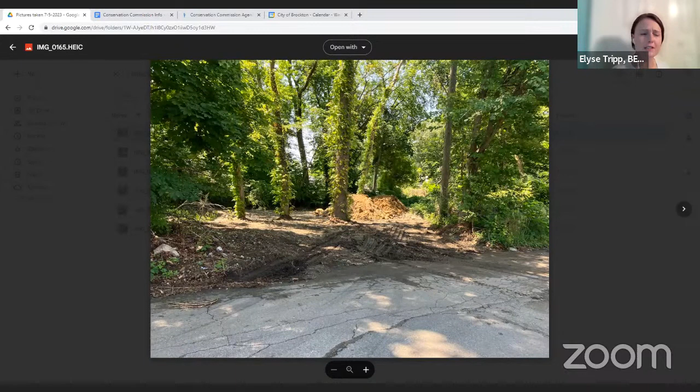I'm not sure, as far as the pipe, are you referring to like a culvert or something of that sort, Mr. Lopez? Yeah, corrugated pipe. Okay, yeah. From one side to the next, just to see if it could not have like a barrier if I fill it up or anything like that. Because I did all of that just because I didn't receive a notification that there was protection for the land. So I went ahead and did the clearing and everything like that, thinking that there's no conservation.

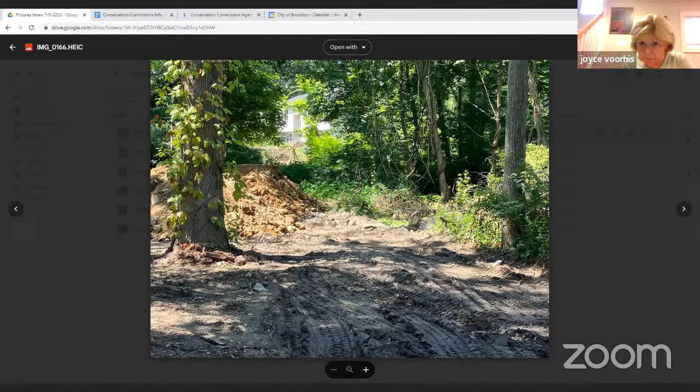And that's it for photos, Kyle? I've got some more photos. So you can't quite see it from the photo. I didn't get on the property, so all these are taken from the street. But back in this corner, there is standing water over here, and it kind of extends back over this way behind the pile of fill here. And that's kind of the area that the intermittent stream is in, and it goes along all the properties next to this down the road, if that makes any sense.

So there's certainly concern here, and there's another thing to add here. Once we got the complaints from neighbors, Director May of the planning department pulled up some old development plans for some properties on nearby streets, and on those plans there are some wetlands delineated, and that's another reason that we were able to confirm that there was a resource area here. But again, that didn't come up until after we got complaints from around the community. Mm-hmm.

Okay. Am I able to see the plans? I would like to know where the resource area is. Yeah, if possible. The plans weren't specifically of this area. I think it's Burrell Street, just down the way, where the Bellevue development was. So it's maybe a few houses down, but I can certainly forward that to you. That would be great.

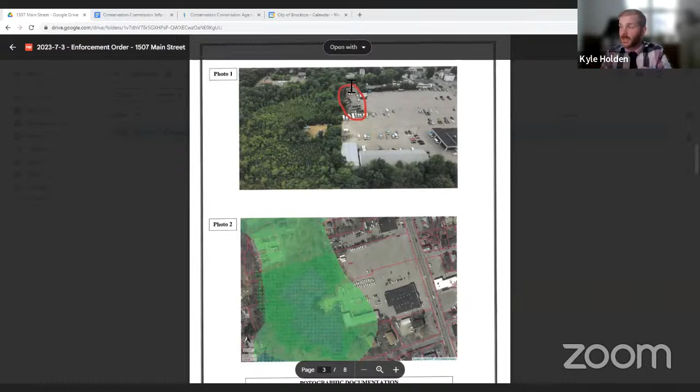This bottom photo here is showing the resource areas that are mapped on MassMapper. This parking lot here is the one that was extended, and it was extended into this resource area here, and you can see that circled in red on this top photo. So that area in the top photo is the area where the pavement was extended. And I don't think it's actually pavement. I think it's like a hard packed fill or something. But in any case, the parking area has been extended here into the wetland resource area. So that's why the enforcement order was issued. Thank you.

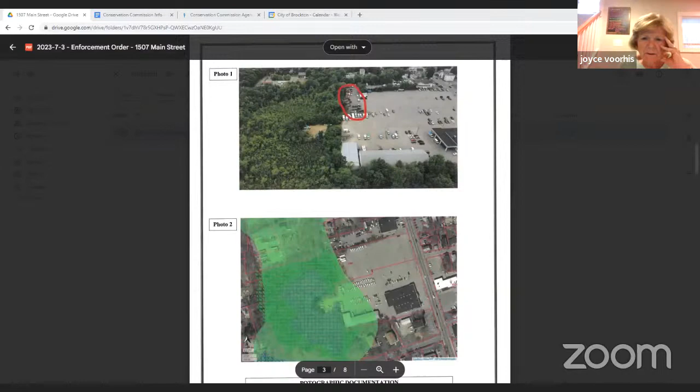Yeah. And have you promoted someone? Oh, Mr. Simo. Yep. Jay Simo has been promoted and is able to speak. Oh, and I guess we have another one called George. I think this may be George Brewster. I think he owns the ambulance service company, which is in the lot basically that owns this. All right, gentlemen, you're both here. You're able to speak. Thank you.

First of all, this is George Brewster, and I own the property. I'm trustee of the property. I rent the property to Brewster Ambulance, which are my sons. Our neighbor next door had asked if he could park a tow truck on our lot. And my sons told him, yes, you could. Well, that somehow evolved into multiple tow trucks, a multiple fenced in area, and it was all not with permission. Now, I'm willing to clean it up. Tell me what I need to do. And I will go after the person next door for damages. Thank you, Mr. Brewster. That's very succinct.

We try to be a good neighbor. We try to help out our neighbor, and this is where I am tonight. We also have the Brockton police buses on that lot. They need to be told to move. So you tell me what I need to do to clean it up, and I will do that. Okay.

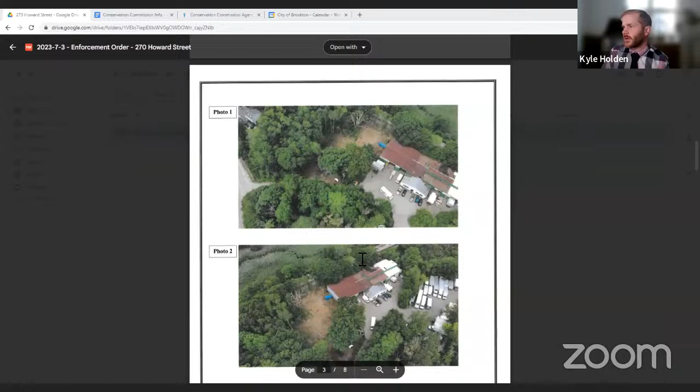So here are a couple photos that kind of show the area that's been disturbed. So this all used to be wooded here. And then I'll show you another. I think I've got it. Yeah.

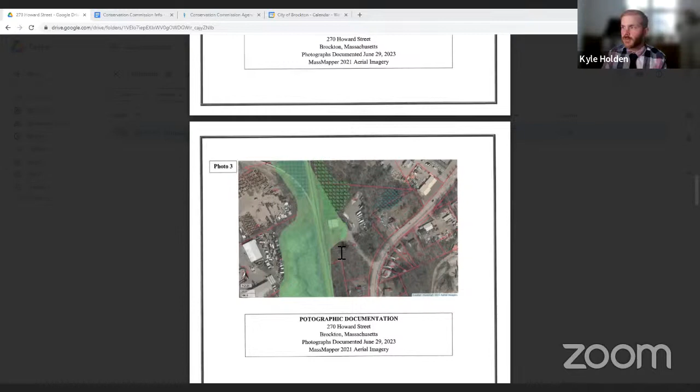And the concern is that any work that was done over here would be within buffer zone to the wetland. And then there's a little bit of flood zone that was also impacted. So that's kind of a brief overview visually of what's happened here.

All right. And I guess, do you want to hear from Mr. Burrell? Sorry, thank you. Hi, Mr. Burrell. Yes, hi.

Okay, so I met with Kyle last week just to discuss some of what has happened there. And again, my sons were trying to solve a problem we had with our insurance company, with trees, with graffiti, and clearly they overstepped. So I'm just looking to see what do I need to do to rectify what happened, and we'll get on it.

So once again, wetland delineation is necessary at that point as part of the enforcement order? Yeah, and that language was included in this order as well. Basically, the enforcement order includes the following: cease and desist all earth moving activity and construction within the flood zone and the 100-foot buffer zone from that wetland. Establish erosion controls at the existing limit of work to protect the resources that weren't disturbed, and then generate a restoration plan that will be submitted to the commission.

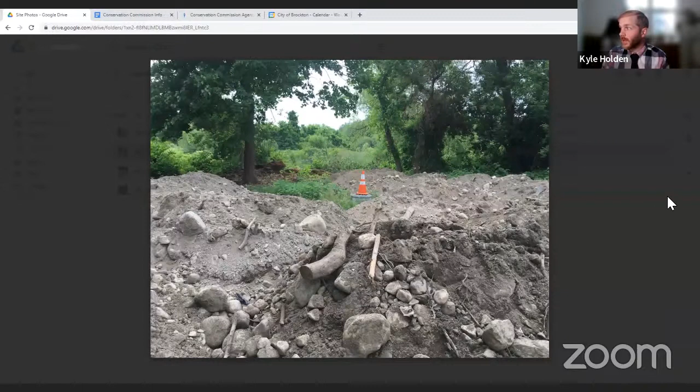I've got a few more here from Megan. Let's see. Okay, so she's actually farther on the site now. I think Trout Brook is kind of back in this area, but I'm not quite sure orientation-wise, but there's obviously quite a bit of fill that's been dumped back here. And again, these are all old photos. Wow. But it's pretty significant, right? I will show you the photos that I took when I was there last week or the week before.

And again, I've not heard anything back from anyone here, and I can check to see if anyone has their hand raised in the attendees to speak to this, but I didn't see anyone here to talk about this at all. And you're sure of the identity of the property owner? Yeah, I'm fairly certain. The individual it's registered to has their name on the mailbox outside the house, so I think it's the right person. They may have just declined accepting the certified mail. And I rang the bell when I was there the first time to try to get access to the site, and no one came down.

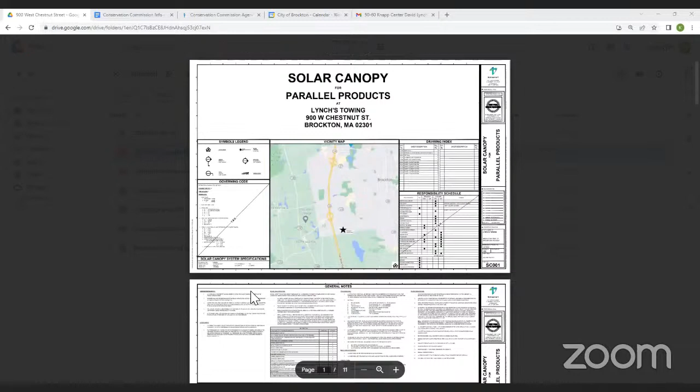Thanks. Okay, Mr. Farland, I've seen the very large tow trucks for Lynch's with lots of trucks and things on them. How high are these arrays? The arrays, just so you know, we're doing this throughout the Commonwealth. Specifically with Parallel Products, we have about 30 sites or so, and we're focusing on a lot of junkyards. Most of the time we're cleaning them up. This happens to be one that's going to be a new junkyard.

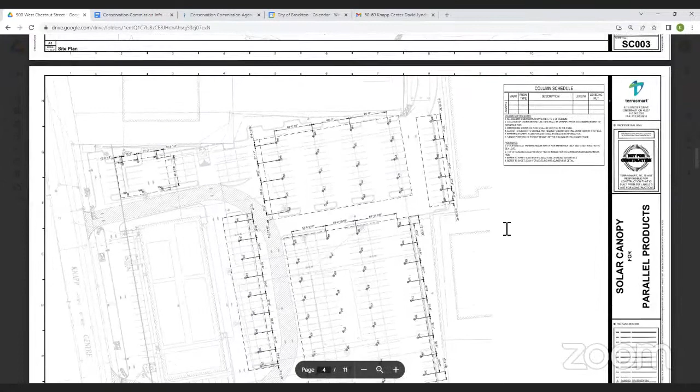So they're designed for trucks to be able to drive underneath them. In some instances, fire apparatus can get underneath them as well. There's a detail of the heights if you keep scrolling down. But they range anywhere from 16 feet, probably at the minimum, to around 25.

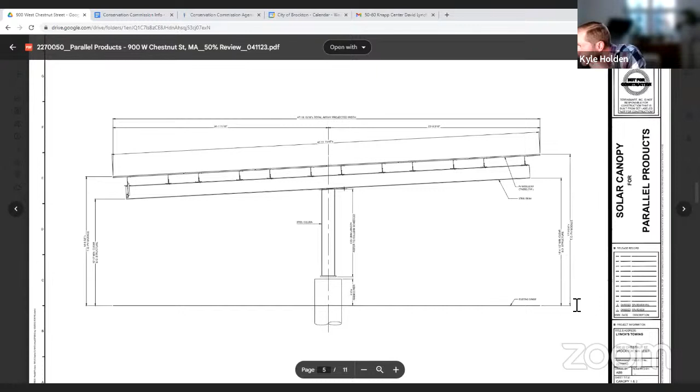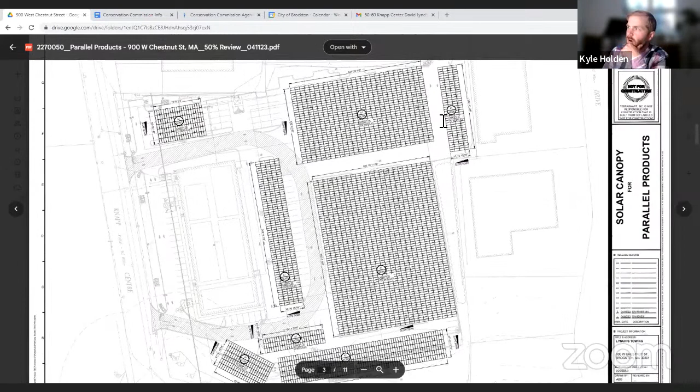So for example, this one we're looking at now has a minimum clearance on the left side of 12 feet, and a maximum on the right side of about 14 feet 4.5 inches. But this is just one panel. As you look at this plan, there are multiple solar arrays, each with different specs. Some are raised higher than others, and that's all within the plan.

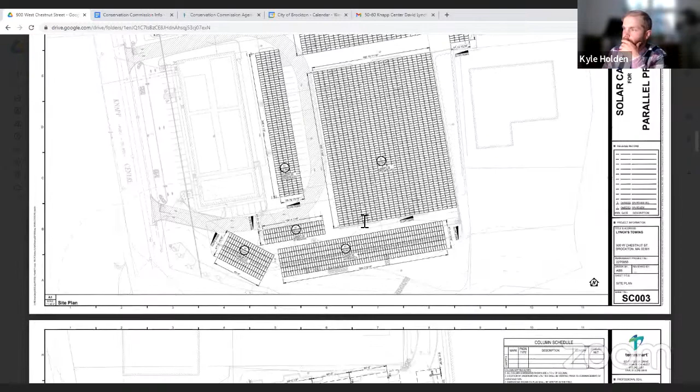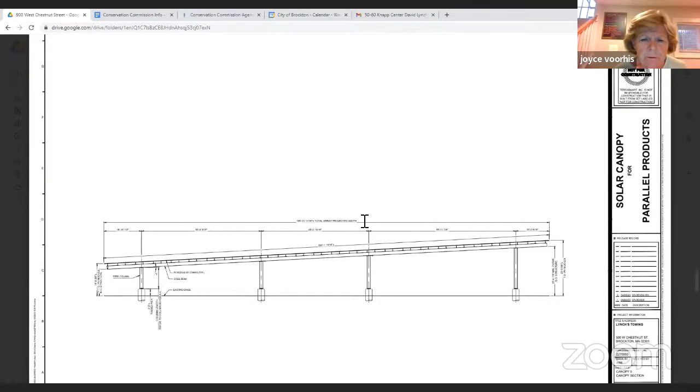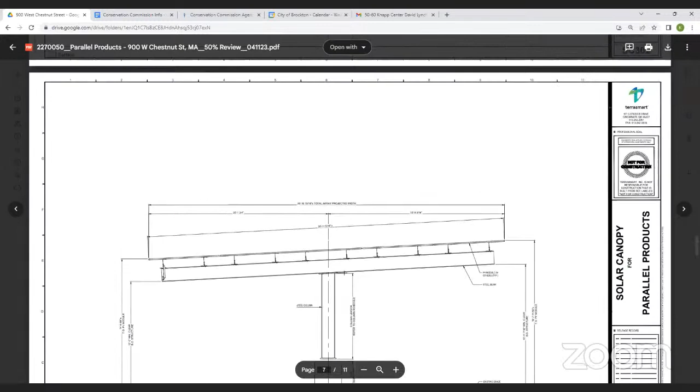Okay. Yeah, they're all pretty similar. The larger ones tend to get a little higher, as they're all pitched at 5 degrees, so the longer you go, the higher they'll get. And what is that material that the water will be able to flow through? It's a steel structure, and the solar arrays align along it, but there's a 2-inch gap between all the arrays, so it's not like a roof where it would all sheet flow to one end. It flows through each individual panel, as it would during any rainstorm if the panels weren't there.

Thank you. Are they all designed to flow towards the storm drain? Yeah, basically the grades on the site aren't changing. The proposed grades, I think it was Holmgren that designed this, aren't changing at all. So in regards to the stormwater, it's the exact same stormwater calcs.

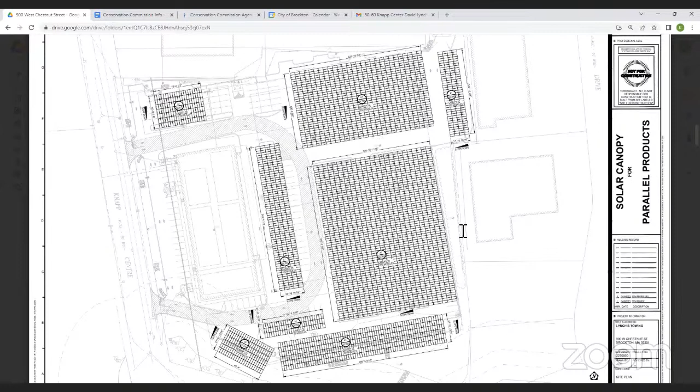Elyse, do you have any familiarity with this kind of a project? I've certainly seen it done in the past. I am curious as far as the installation of the piles. Do you know how deep you have to go, or how deep you're planning on drilling to install the

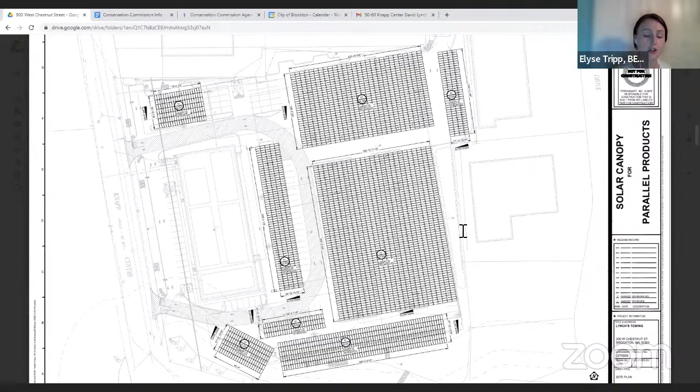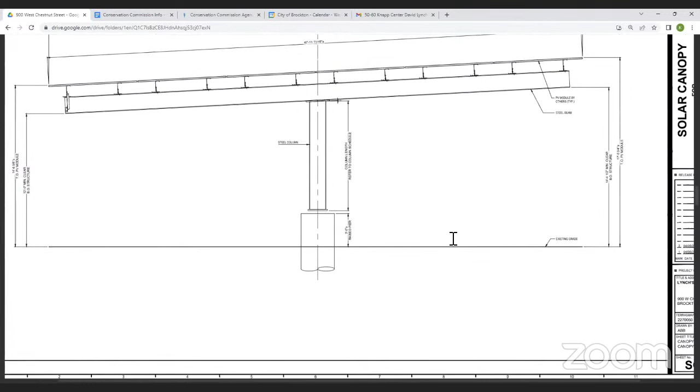piles, or the columns? Yeah, typically, so these plans are at 50% production drawings right now. The geotech report and the structural will be finalized. But from previous past projects, and we've done a lot of similar projects with sites like this, where the soils are all disturbed, urban fill, we end up going typically down further than we would normally if it was a clean site.

But I would say on the average, we can go anywhere from 10 to 15 feet, or if we hit bedrock. Do you anticipate any dewatering to be necessary? I'm not as familiar with this site in particular, so I'm not sure where you are anticipating intercepting the water table, if at all, on this. Yeah, if we do, we will be dewatering in accordance with, I believe, the order of conditions already. Okay.

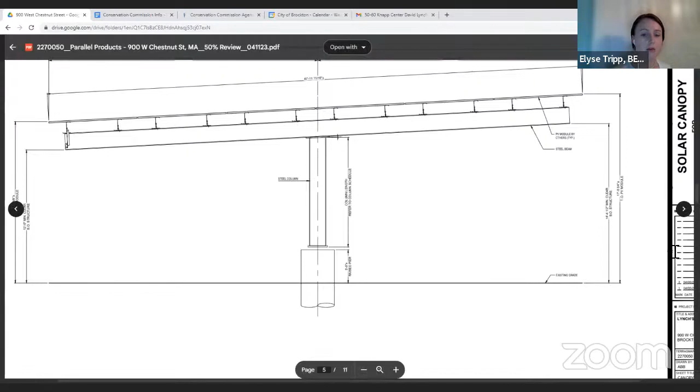And then the second thing that the commission might want to consider, just as far as restoration or seeding of the buffer zone. It looks like some of the canopy overhang is kind of over the existing stormwater basin, and part of it's over some area that might be restored, I don't know, with some sort of seed mix or something, as far as it would be a shaded area. Not sure if there's any certain plants or plantings proposed.

Again, I'm not as familiar with this one, and if that would just impact any of that kind of proposed restoration. I believe we're talking probably about the, see the north arrow on here. It'd be the northernmost. There's a really long one, and then there's a little bit of a shorter one. Yeah, I think that's the south side, right? The bottom of the plan? I guess it depends on which sheet we're looking at.

Which plan am I looking at? I'm looking at a different one. I'm sorry. I'm looking at this project, so it's going to be the bottom of the plan. Yeah, so it's this area down here that is the resource area. That is the resource area. Yeah. And how close will they come to that resource area?

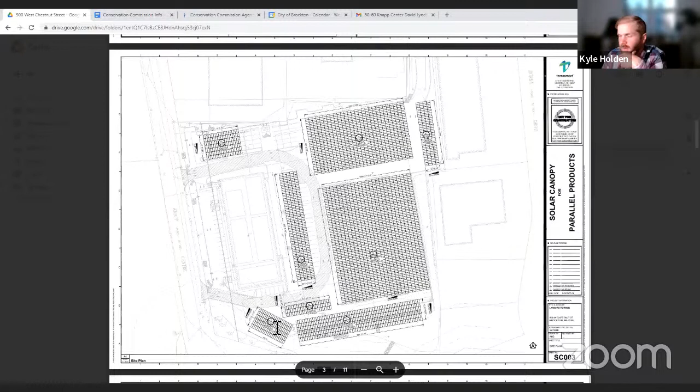It's just hard for me to see on the, it looks like, in this corner of this one, I think this line here is the 50-foot buffer zone. So it will cross over the 50-foot, nearer than 50 feet to the wetland. And then I think this line is the 25-foot, and so the overhang is going to be over part of the 25-foot.

So where would the actual pilings be? Would the pilings be within that 25 and 50 foot zone? No, the pilings are all in the proposed pavement area. So we're not going any closer than what the previous plans were. They're just basically on top.

I know. I guess my big concern, Peggy, I don't know if you remember going out to this site, and it was a big meadow. It was really kind of a full meadow. And then to that site, yes. And a big meadow, yeah. So it's one thing if you're going to take fill down and then pave. Another thing if you're going to drill down 16 feet into that, if it's close to that resource area.

I just don't know. And seriously, I'm only asking the questions of the specialists that we have here. I don't know if that should be looked at by someone or not, or I just feel like this is quite a change that I don't feel comfortable making that decision now. But I don't know how the rest of the commission feels.

It's just basically like doing borings where it's not an open excavation area. So the boring goes straight down, the soil gets removed. So it's not like you have an open test pit 16 feet deep, because obviously that would be a lot of disturbance. It's more of like a boring going vertically down. So there's not much soil spill. It comes right out of the hole and it gets removed immediately.

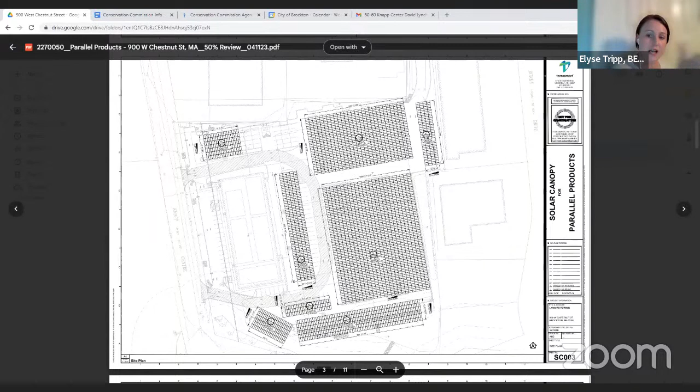Okay. I just remember this case being a little uncomfortable with how close everything was coming to the resource area. And the columns are proposed at the furthest edge of the lot. So it would be worth making sure that as that operation is occurring, it's occurring as clean as possible. Right. It's tough because you're working so close. So I would like to see that within the amendments, or the addition. There could be special conditions, if that could be done.

Peggy, your hand is up. Yes, I had a couple of questions. So the solar panels will be installed first, and then the driveway will be poured afterwards in the parking lot area. So that long rectangle is actually the driveway where the trucks come through into the parking lot. Is that correct? Yeah, I think you're talking about the loop. Yes, correct.

Okay. Now, you will be putting up silt socks anyway, for both. Do those pilings interfere with the pouring of the driveway and the parking lot area? Nope. Everything was designed around the parking spaces. If you take a look at the plans, you'll see there's little columns that are all centered on the parking spaces. Okay, and then one more question. Sure. If there is a repair needed on the solar panel, how does that work?

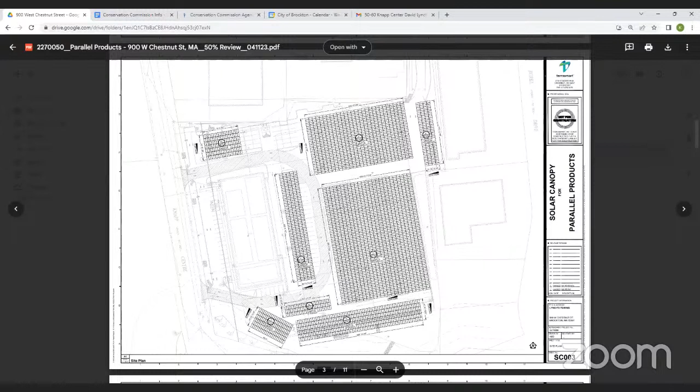In regards to the dewatering, we can certainly submit an additional dewatering plan geared more towards the drilling, Madam Chair, if you would want us to do that. I would appreciate that. Thank you. So would it be fair to say that we might get to see all of the different amendments that would fulfill our needs to make sure that resource area is safe, and that you might present that to us at the next meeting? Sounds good. Commission, how do you feel about that? I think that's fine.

Madam Chair, I'm not sure if Mr. or Mrs. S. Daggett had anything to add. They had their hand raised for a bit. Okay, I'll acknowledge that in a minute. What do you feel about getting more information from Mr. Farland? I would say, if the commission would feel more comfortable having the additional information, then that's what the commission needs to do to feel comfortable with the project. I'm not sure if Kyle has anything else to add, but it's your choice. Kyle? I don't have anything to add.

Thank you. Okay, I guess S. Daggett. Yeah, no, I have nothing to add. I had raised my hand because I wasn't sure if Christian was online. I am a project manager with Farland Corp. When you were asking if Christian was here and he didn't answer, I raised my hand. Okay, thank you. Thanks, Scott. Welcome.

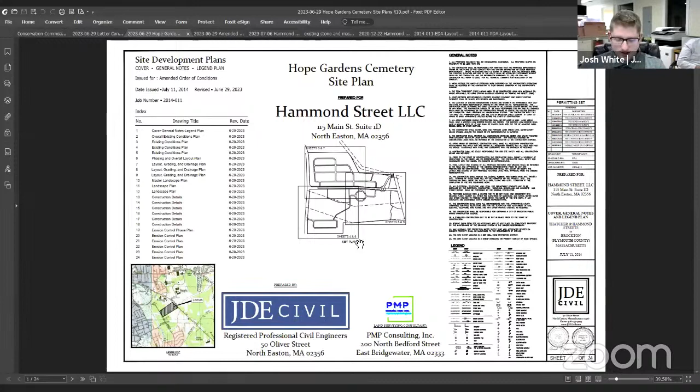So just to introduce myself, my name is Josh White. I'm from JDE Civil, the civil engineer for this project. And I'm here with Doug King, the applicant and owner of the property. So basically this project was approved back in 2015, and it's gone through a number of changes since we were last here in 2020 for an amended order and an extension permit, which is the same reason we're here again tonight. Work has started on the site. The erosion controls around the perimeter have been installed and inspected in the past. And the applicant is looking to modify the site plan for some specific features for this proposed cemetery.

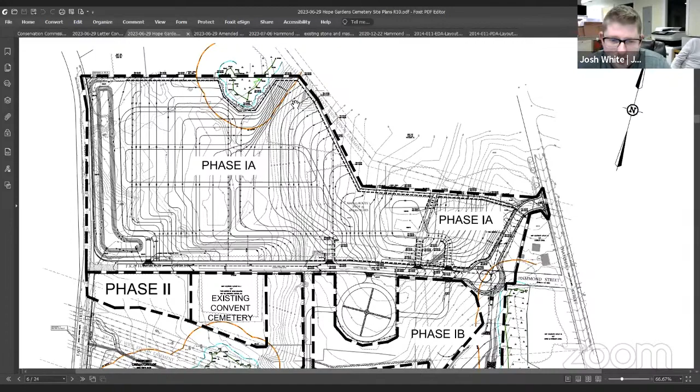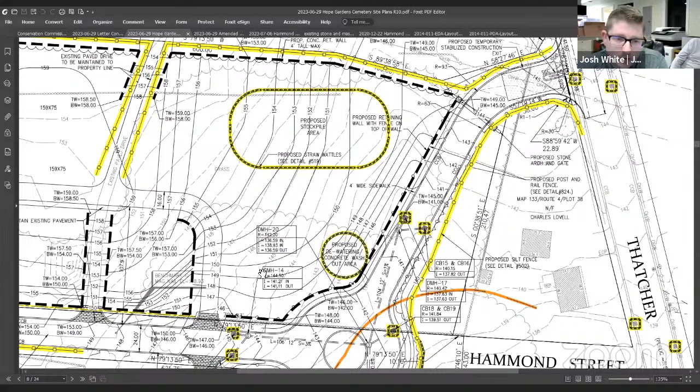And you can see the wetland areas up here is the only one to the north. So basically, I'll go to another sheet, but so this is the entrance off of Thatcher Street, and we're proposing adding a concrete retaining wall on this side to, like I mentioned in that picture, just to raise the grade, both to provide that feature wall that the applicant's looking for, and to raise the grade for adequate burial depths.

So basically this is a path that goes to the neighbor to the north. The nuns there, and they wanted to keep this path. That's how they go to their cemetery over here now. So we're proposing the wall there so they can keep this path open. And then they'll continue down the road of the proposed gravel driveways.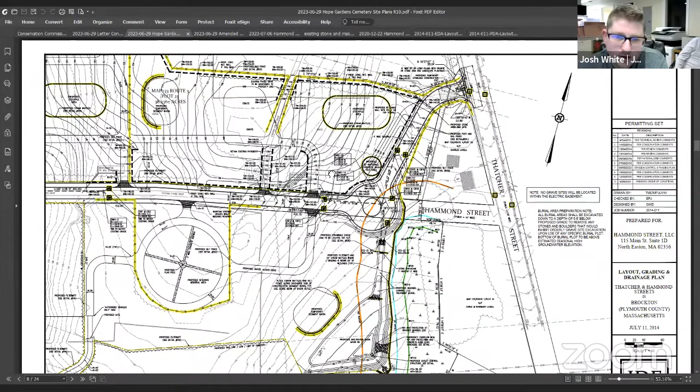Like we're showing. One change that did kind of happen after we submitted these plans, basically, like I mentioned, this path, the nuns initially wanted to keep this section, but we met with them after we filed, and they are okay with continuing on the gravel drive either way. So this section of the wall, I believe it's like 50, maybe 75 feet of wall on either side, that's not going to be necessary. It's just going to be continuous along the front. And so like I mentioned, that'll raise the grade on this portion of the site.

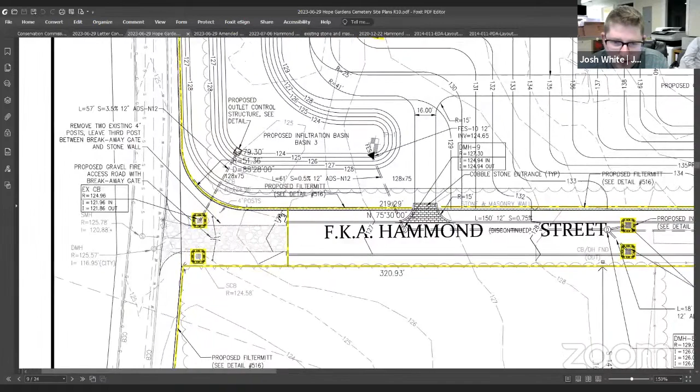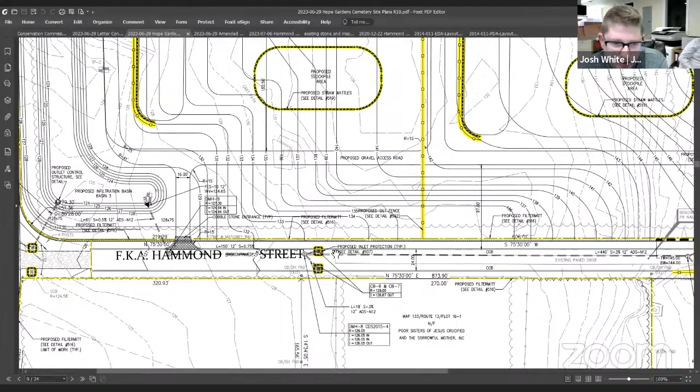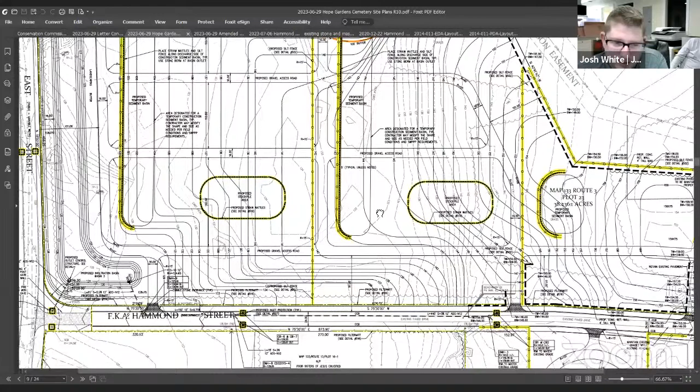So this is the end of the existing pavement in Hammond Street, and then the existing wall goes here, and it stops right here. So from here, we've got a proposed wall, and then the entrance to raise up, and then this continues to the other side, which I just showed you before. So basically the purpose of this is to create that eye-popping feature that you see in various cemeteries, and raise the grade to provide the adequate burial depth throughout the property. And that's basically the intent for this.

Like I mentioned at the start, all of the perimeter erosion controls are in place and have been inspected in the past, and the limit of work that was previously approved is not going to change. All this is within the same limit of work. So that's basically it.

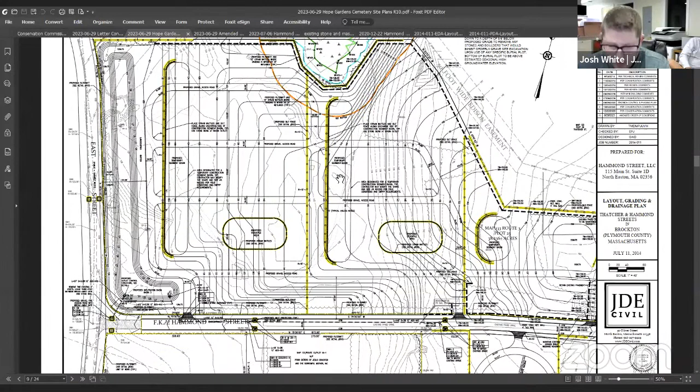Madam Chairman, Jim Burke, just to add, great job, thank you very much, Josh. But it isn't just the aesthetics that we're dealing with, Madam Chairman. Mr. King has run into refusals because of the ground condition, soil condition, rock, ledge. So the increased level is for purposes of functional operation of the cemetery, to allow him to utilize the facility without dealing with the impactful rock and ledge that exists at the base level. So that's another consideration.

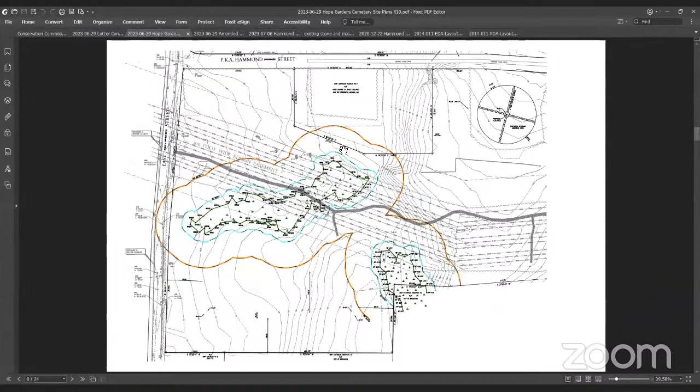As to the sisters, I will tell you, Doug and I both met with them, and I've had the pleasure of representing the sisters over the years. The sisters of Jesus Crucified and the Sorrowful Mother. And they're excited about the plans. This was their cemetery for the convent, and they are pleased and supportive in terms of it going forward.

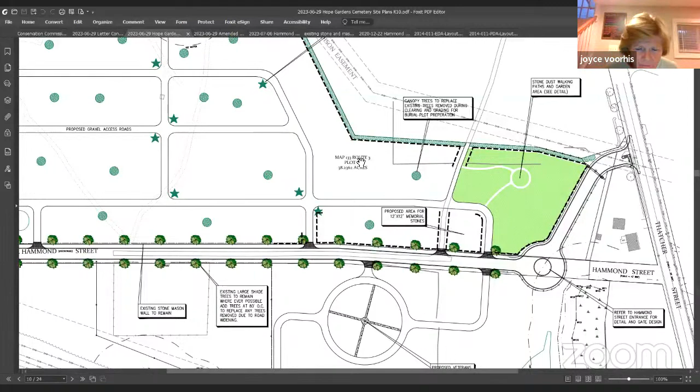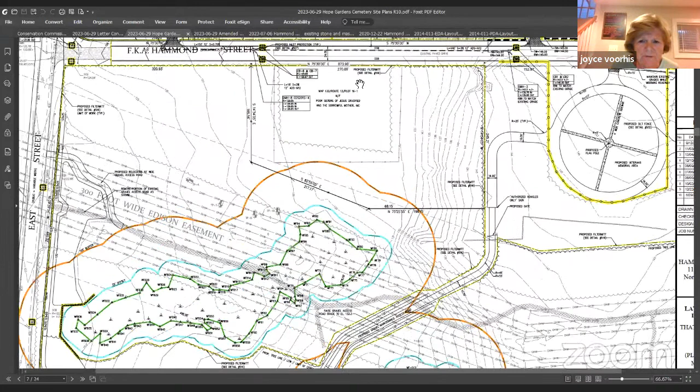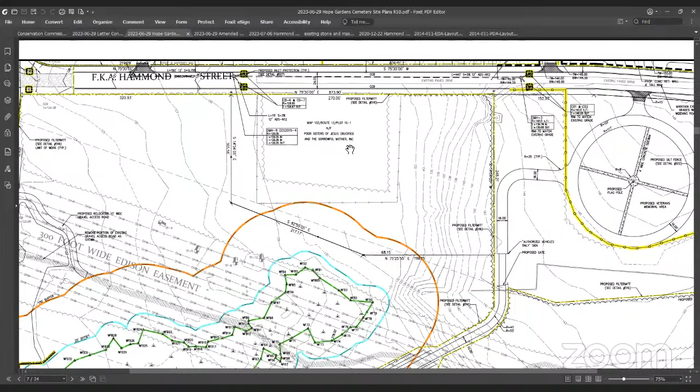I just had a quick question. So there are sisters that are buried there now? Yes, there are. Okay, and can you show me on the map where that is? And because this is really an expansion into phase one of a much larger facility, correct? You're correct. Yeah, it is. And part of the arrangement when Mr. King took over the project is that he will be responsible in perpetuity for the care of the sisters' cemetery. Okay. And then how much fill exactly are you bringing in?

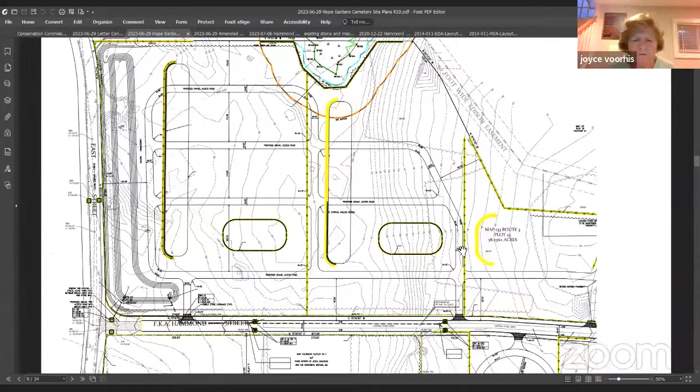That's probably a question for Doug. Like I mentioned before, it's roughly 4 to 6 feet. It's 4 feet on the walls because all the walls are 4 feet tall. And then towards the center of the site, it's about 6 feet of fill throughout this upper portion of the property. It's about what, 10 to 15 acres? Yeah, it's about 15 acres. 15 acres of fill. Wow. Where do you get the fill and what do you use for it?

I'm sorry, can you repeat your question? I missed it. Yes. What do you use for fill? Where do you get it? It's like a glacial till clay material. Yeah, so Doug said it's a glacial till material. It's being trucked in, and I misspoke about the acreage. The total acres of this upper portion is about 6.8 acres. The entire property's the greater number we gave before, so it's about 6.8 acres just for the phase 1 section. Yeah, just to clarify that. Yep.

I was just curious as to, it seems like it's been hanging around for a while. Why? Well, you had COVID that really delayed it. No, it just seems like you get up to a few months before it's going to expire and then just ask for an extension. And then this does look like quite a, is this a substantial change to the original plans? This terracing?

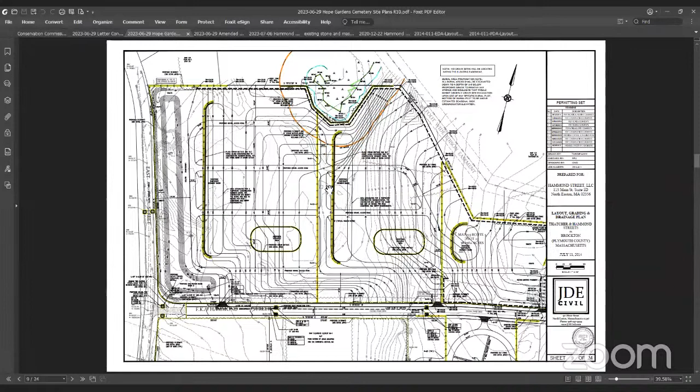Kyle? I have one more question. What kind of equipment will be used and how close will they be to the regulated land? So from the previous submittal and order of conditions, like I mentioned before, the erosion controls are all still in place. So the limit of work is not changing. The only wetland on the upper side of the site is this A series wetland here. And we're holding at least 25 feet. The erosion controls, I believe they're 30 feet, yeah. 28 to 30 feet off roughly.

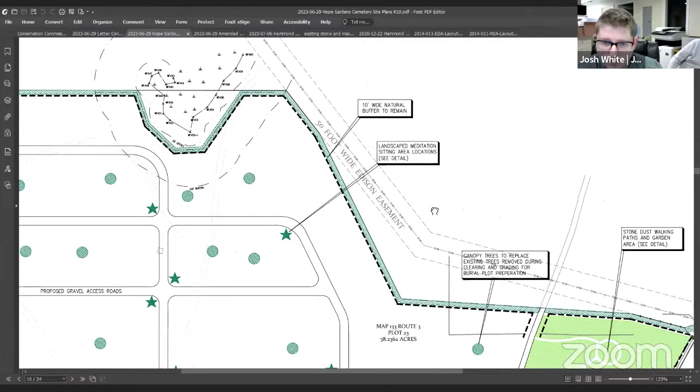And it doesn't show on this plan, but there's a 10-foot wide natural buffer that was required from, I believe, the original submittal. So that's 10 feet right there. That's gonna remain vegetated. And that wall will be built first. Yeah, the perimeter walls will be built first and then the grade will be raised up in between. So it'd be better control to make sure nothing does go into the wetlands. Yep. Because you'll have the wall.

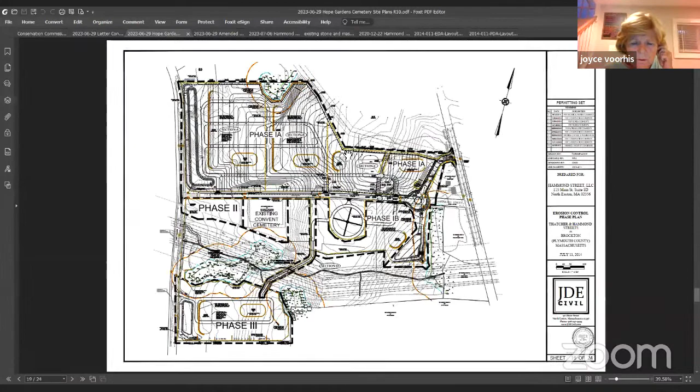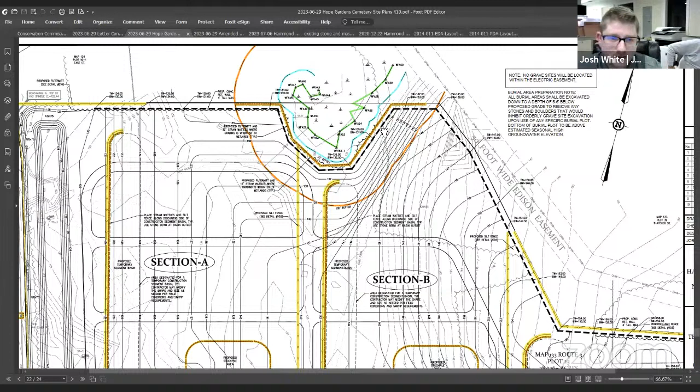Yep. So what are the erosion controls that you have at that site right now? So we have silt fence and filter mitt on the perimeters. The sock stuff. Yep. And is that from 2015 or 2020? No, it was installed more recently than that. I want to say it was probably a year ago, maybe a year and a half ago that they installed it and we inspected it. Mhm.

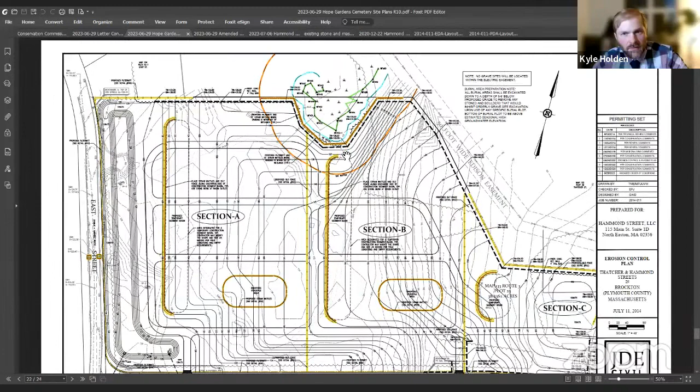Kyle, have you been out to the site? I have not been to the site, no. I would feel a little bit better if you had before approving anything. I don't think any of the commissioners were on the commission at the time that this was originally permitted, because it was a long time ago. And it does seem like it's a pretty substantial change. So if we might be able to have the agent go out and take a look and bring back a little more information for the next meeting, I think I would feel much more comfortable.

Madam Chair, might I ask a clarifying question? Of course, please do. So it looks like basically around where the bordering vegetated wetlands are delineated, there's a retaining wall proposed. Is that part of the newer work, or was that retaining wall always proposed? So in short, the retaining wall is new. Okay. Oh, I thought that was original. So I think one thing to consider is with the fill and the raising of the grade, especially where we go down from 143 elevation down to 136 in a short span.

It is just to see if the applicants have kind of just looked at how the stormwater is going to flow towards that area, as well as for the installation of the retaining wall, what kind of access is going to be needed, just to make sure that as the work is done, that it's done as carefully as possible.

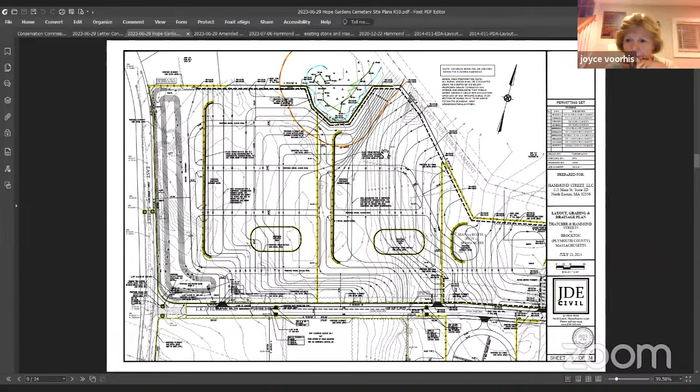Oh, are there any abutters? Any abutters at all present that might want to be heard? Do you see anyone? I do not see anyone with their hand raised. Mr. White, could you just stop sharing your screen? Yep. Thank you very much, by the way. Yeah, no problem. And if there are no abutters, I just have one more comment to make, but I'll take the abutters first if there are any. I don't see anyone with their hand raised. Okay. Thank you.

So just in general, when we compared the new design from the previous design as far as stormwater, we kept the overall watershed, the flow of the water generally the same. So we didn't change the flow patterns too much. It's the same area, like I said before. So they're all going to the same design points that they were before. The change in elevation would be the only change. But we did take that into consideration when we basically regraded the entire site. So we did think about that.

Okay. But I think it does take a review. Yeah. Okay, good. So I entertain a motion then to continue 0 Hammond Street to the next meeting.

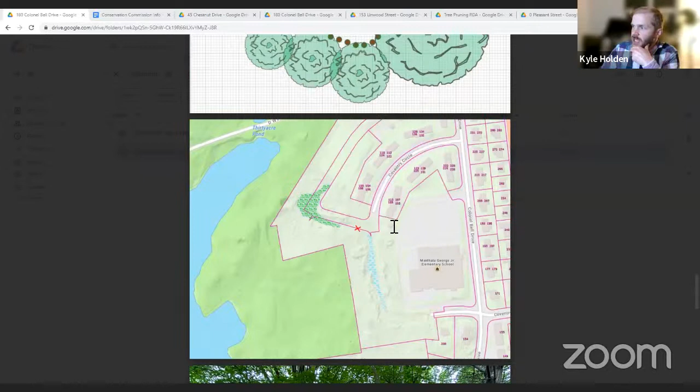So here's a view of the school, just to give a perspective of where this is. As Owen said, this little shed here is where part of the existing outdoor classroom currently exists. There's some picnic tables here. There's a path that follows this way, and then cuts back up this way. And so the area that's marked with the X is the approximate area of the sitting circle site that they're proposing. And you can see it is nearby a couple mapped wetland resource areas here.

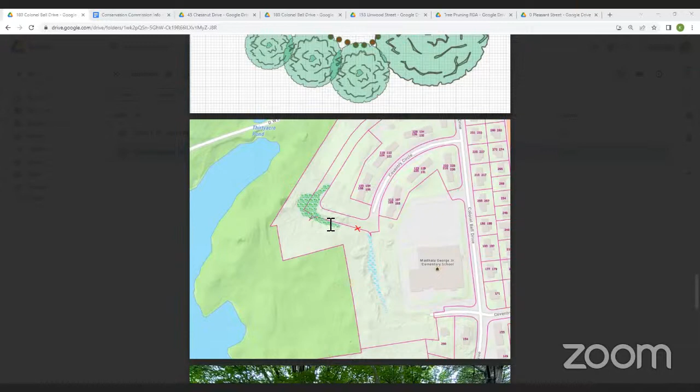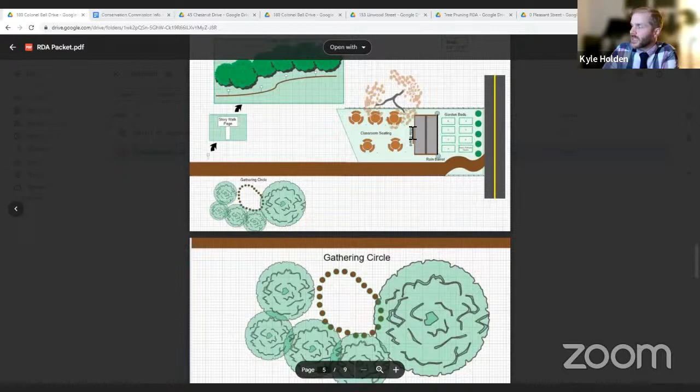So the area is already degraded, and in fact, by removing the asphalt, we're going to better the area around the wetland anyway. We're going to have more infiltration there, so I think this is a net positive for the site. And this is the area that I was referring to. It has the picnic tables, and there's just a path, maybe 60 feet, down to where this sitting circle is going to be. So I think it's a pretty cool development. It's going to get a lot of use, hopefully, from the elementary school kids. So I can share my recommendations if there aren't any questions from the commission.

No. Okay, so I am recommending that we issue a -3 determination for this project, subject to the following conditions. Erosion control shall be installed at the limit of work to protect the 100-foot buffer zone. The gathering circle shall be stabilized immediately following the removal of the asphalt and any earth grading that is required. And the freestanding log bench seats shall not be treated with the water sealing stain on site. And that's it.

I did want to have a conversation with you, Owen, about what the stabilization actually means for this site. I know this is going to be shaded, and trying to get any sort of seed to take hold and really get established there is going to be tough. So I just wasn't sure what your thought was. Is your plan to maybe put mulch down, or what are you envisioning for the ground cover in this area underneath the sitting circle?

We were thinking possibly rough cut wood chips, just as, like you said, a ground cover. We're certainly not going to leave it bare, as that would not be effective long term. So I think rough cut wood chips will be the solution there. Yeah, and I think that would be appropriate. I was just curious what you were thinking. All right, great. Thank you. And we'll be using them in other locations on site. Yeah. It's exciting. It is.